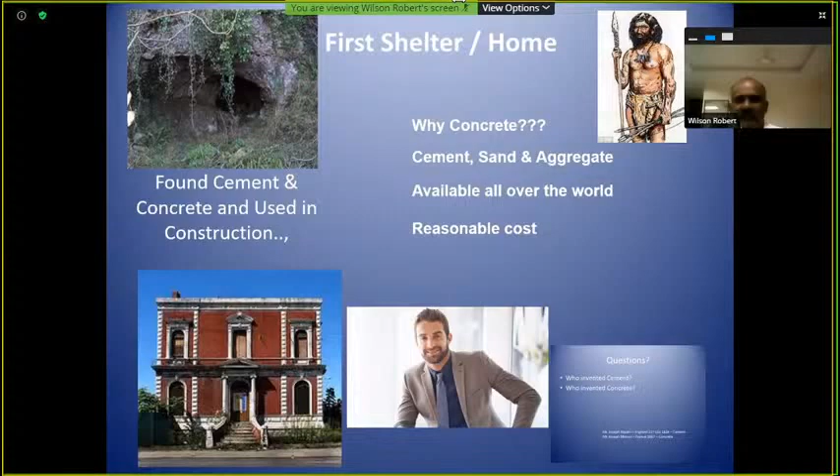So we all started from scratch, like Stone Age. That is the first house, first shelter. From there we invented cement, mortar, steel, and right now we are struggling to manage our living space, our working space in the concrete jungle.

Slowly we are trying to occupy wherever space is available in the metro, trying to utilize the space available, and since we don't have enough space to widen horizontally, we try to go vertical, increase the vertical space.

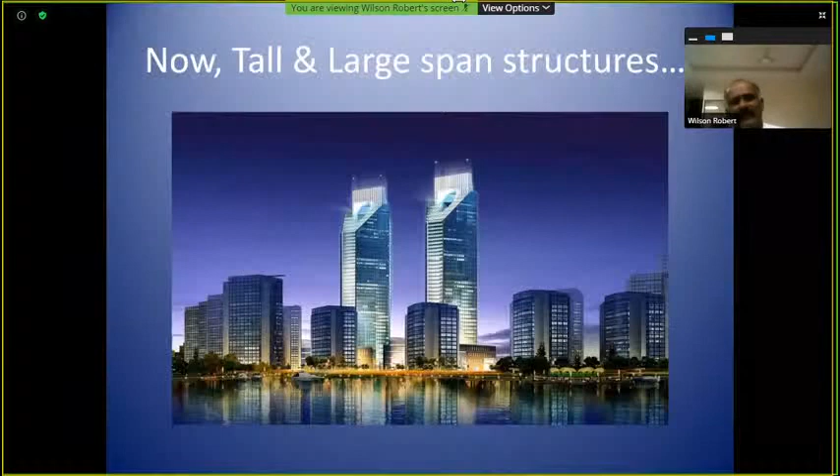You induce the stressing force into the concrete member, so that the concrete member will be ready to take care of the loads to come over that element of the structure.

So in the pre-stressing system, there are two application procedures. One is post-tensioning and another is pre-tensioning system. In post-tensioning also, there are two different types of materials to be used - one is bonded PT, another is unbonded post-tensioning system.

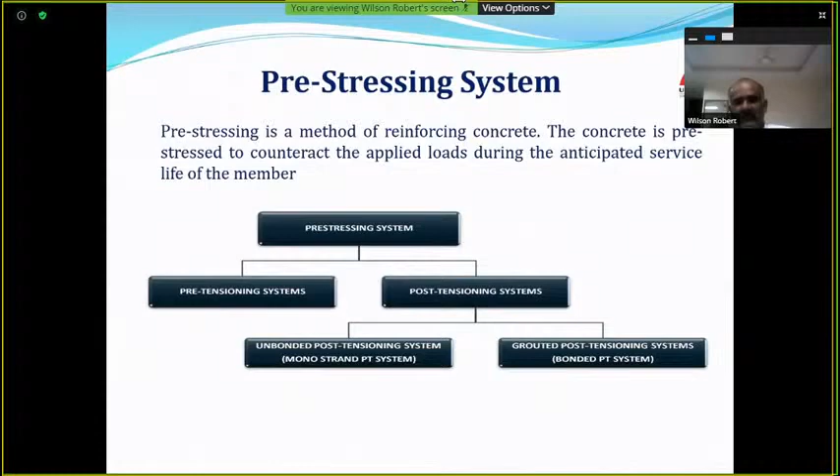So like in post-tensioning, you are inducing the stresses, you are inducing forces against the stresses resulting from external load, like live load, which will come at a later stage, but you induce the force, so when the load comes, it will take care of it.

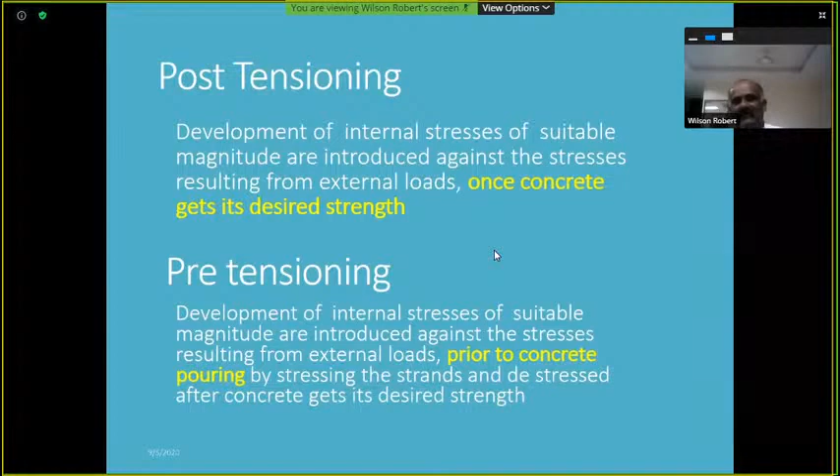Whereas in pre-tensioning, that inducing will take place prior to concreting, and once the concrete gets that 25 Newton per millimeter square, you cut the strands, and because of the bonding, the stress will pass on to the structure.

And this is a simple picture which will show how this pre-stressing system is superior to the conventional reinforced cement concrete system.

So we are replacing the reinforcement, not completely, but partially we are replacing the conventional reinforcement with this special steel. And it is an elastic material.

So now coming to this, once the load acts on any beam, there will be a deflection, and you see this deflection forms a parabolic curve. It happens because the deflection is maximum at the center span. So with ordinary conventional steel, which is a straight treatment steel, you can only have the L-bend at both ends, otherwise you have to keep it straight.

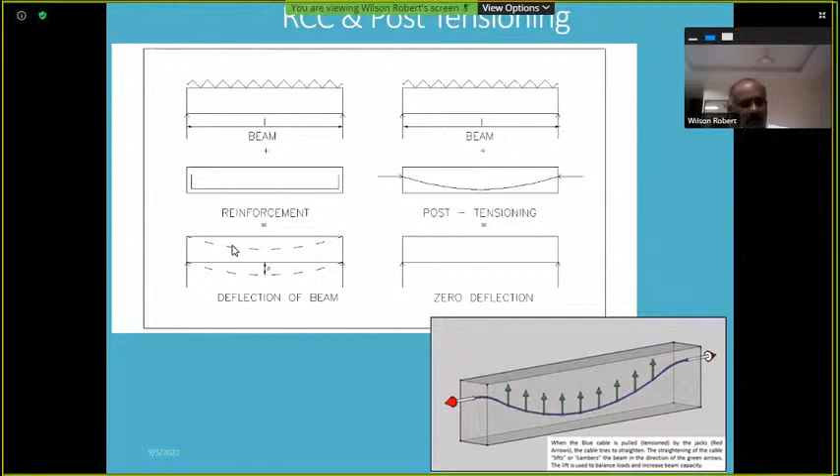On the left side, you can see there are bottom reinforcement provisions. Whereas on the right side, since it is an elastic material, you can lay it accordingly as per your bending moment requirement, and accordingly your deflection lines up.

So once that is laid inside the concrete and you stress it, you apply force to that member, there will be a hogging effect, there will be an uplift. So once the load comes into that, there will be no deflection at all, or when compared to the conventional system, there will be very minimum deflection.

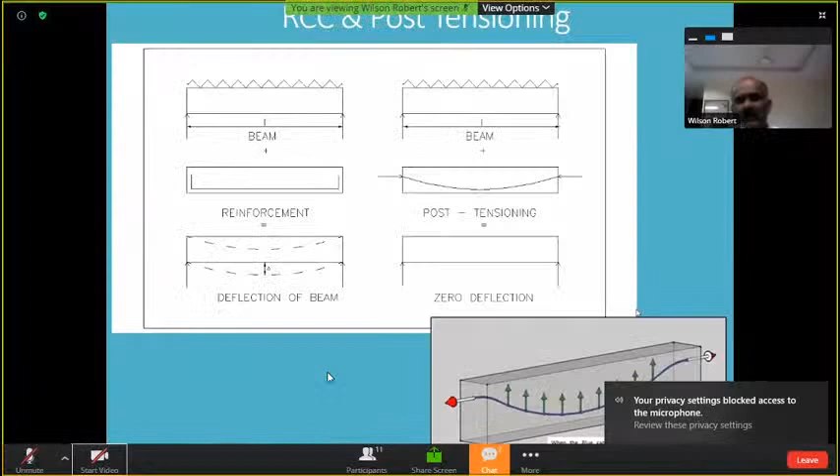Like in pre-tensioning, you tension the strands, the HT strands, and pour the concrete, maybe in the form of girders or beams. You cast it, and once the concrete achieves 25 Newton per millimeter square, you cut the strands with the bonding, it will try to move inside.

There will be an uplift, a hogging happening. So with that, you can eliminate deflection. When compared to the conventional system, it will behave very well in controlling deflection.

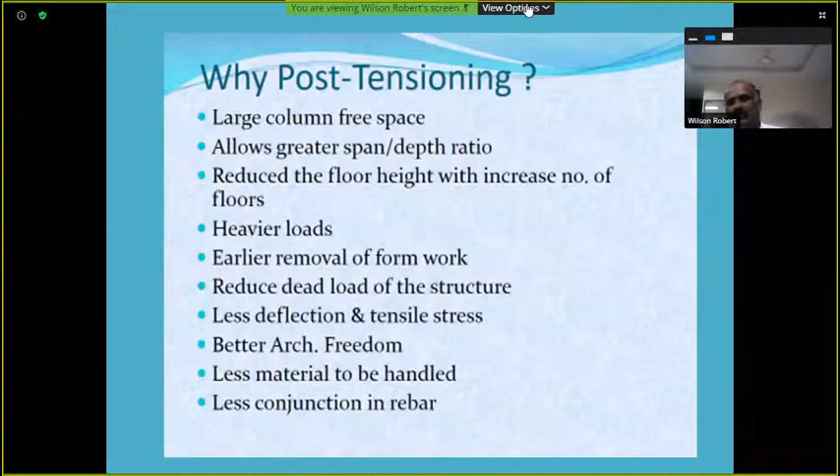You can use this post-tensioning wherever you want large column-free space, heavy and faster construction, and construction for heavy loads. You will have better architectural freedom in this, because you will have almost a flat slab compared to the conventional system, allowing a much better working-friendly structure.

Some components are needed to implement this post-tensioning work. One is the strand, IS 14268 is the IS code governing this material. In India we use 2 diameters: 12.7 millimeter and 15.2 millimeter. The capacity varies - the 15.2 mm dia has a capacity of 260 kilonewton.

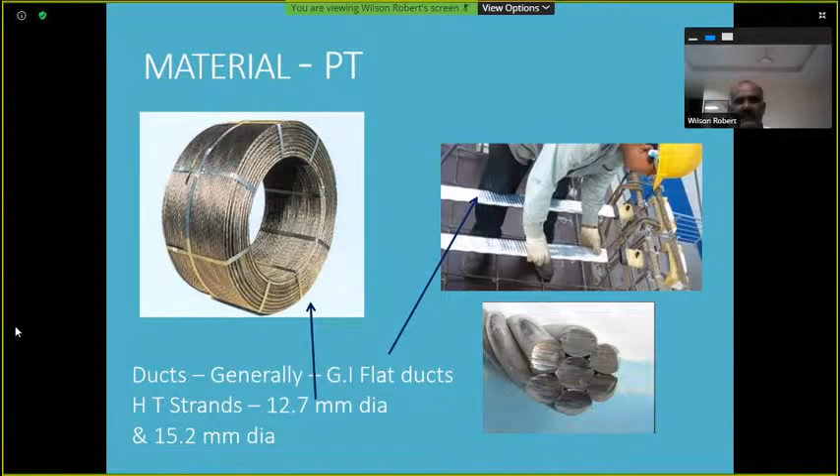So roughly 26 tons load one strand will take, and 12.7 mm is 18 ton capacity. You also need sheathing, the conduit material, generally available in galvanized iron and HDPE, mostly used in bridge projects. HDPE sheathing is very easy to lay and gives corrosion protection to some extent, helping protect the strand. These two materials are used for conduits.

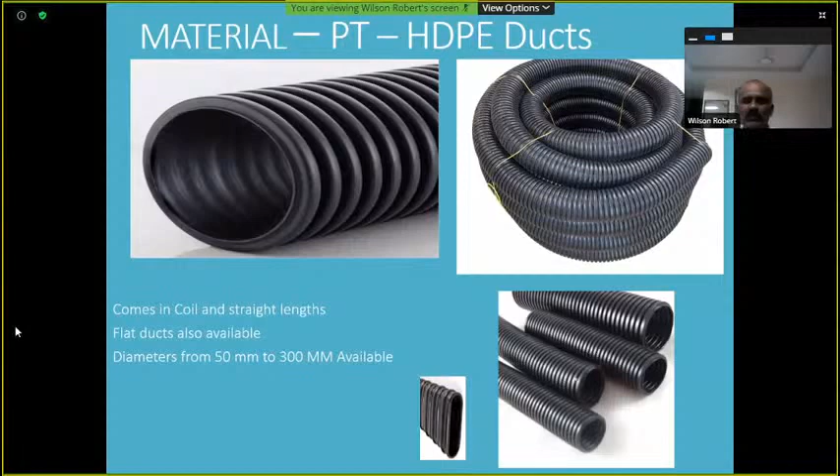This is multi-ducts laid in beams. And other components like anchorage - you can see in the picture there are guide cone, castings, and wedge plate, wedges. These are all the components you need to execute the post-tensioning works.

Generally, the major portion in bridges needs large force to be transferred to the member, so the strand unit will be huge. Whereas in buildings, since your slab element will be 180 millimeter to 300 millimeter thick, flat anchorages will be used there.

You can see the picture. This is called the flat or mono anchorage. You can have 5 strands in one conduit. Approximately 70-ton load can be transferred with one anchorage unit.

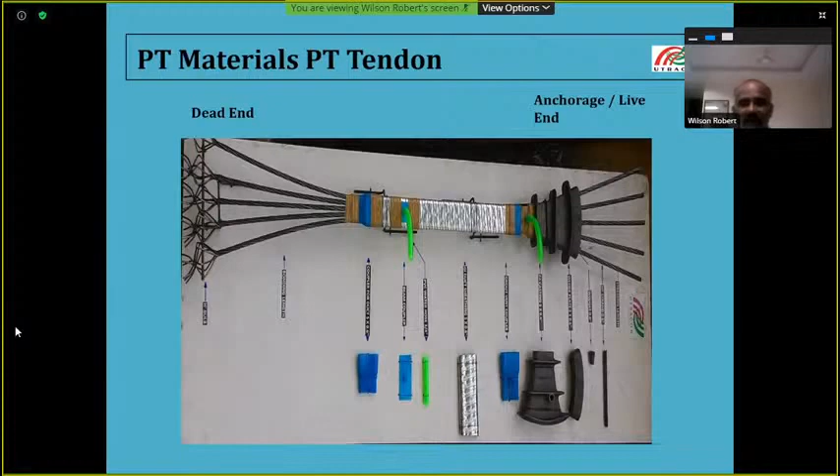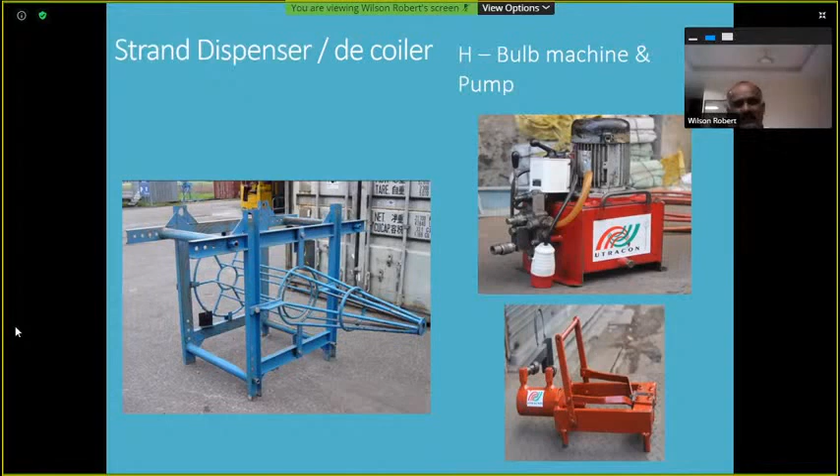Some of the equipment needed to execute this technology are dispensers and bulb machines, and hydraulic equipment - hydraulic stressing jacks - to transfer the force to the member, because you have to pull and stress the strands. Only then does the load transfer to the concrete element.

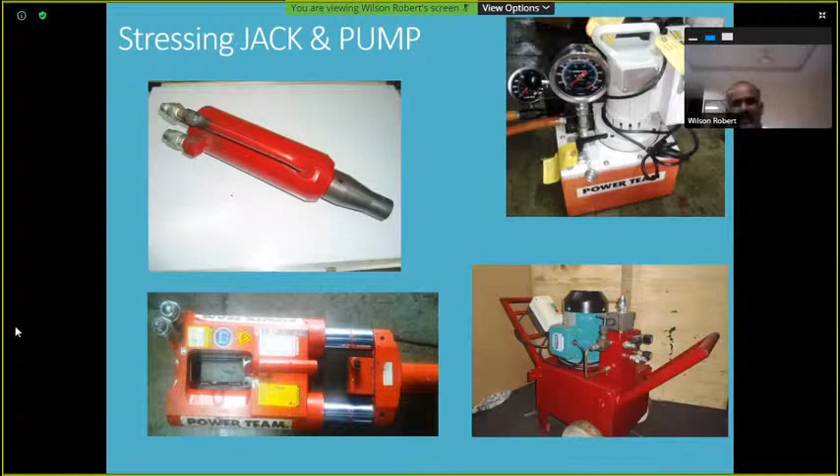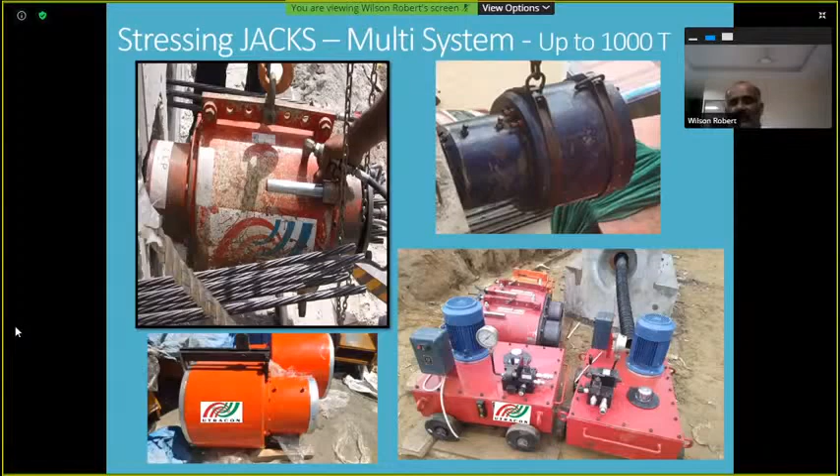So you need special equipment like jacks and pumps, and you can have tendon units from 5 numbers to 56 numbers. 56 numbers means there is a huge force - spans about 60 to 70 meters in bridges need those heavy capacity anchorage units.

You also need grout pumps, because after applying the force, after the stressing operation, you have to protect those strands for their lifetime. Cement is the best corrosion protection material available worldwide, so you use cement to grout those pipes, those ducts.

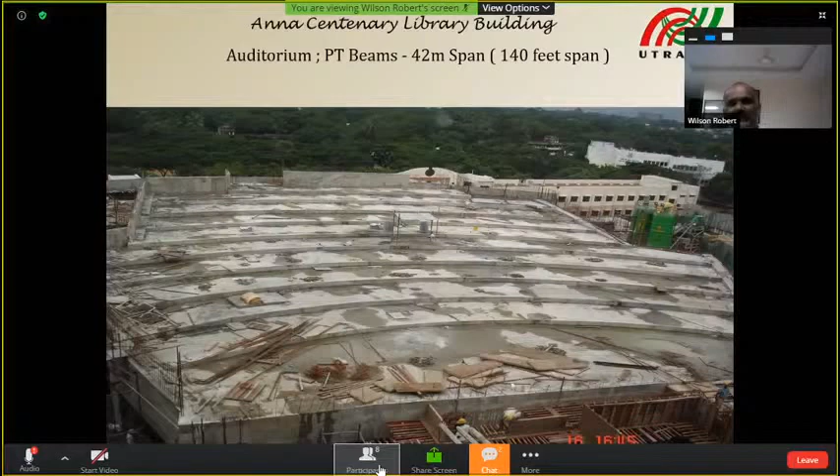This is what we did for the Chennai Anna Centenary Library - there is no support for about a 140 feet span, and it is at the top level. You can see there are elevation differences at frequent intervals - it's like an open air theater on the upper level, and the lower level is a fantastic auditorium without any support. This is possible because of PT.

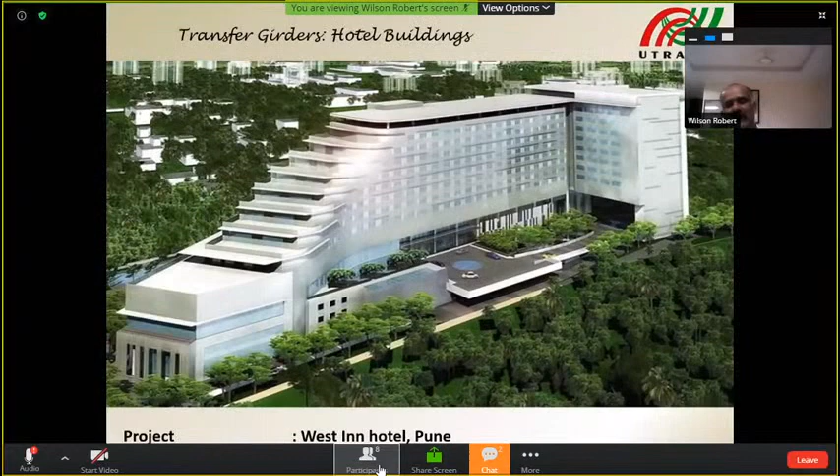Another fine example is a hotel project in Pune. You can see there are only huge columns at the lower level, and above that there are 8-9 stories. It's a hotel building, so the columns are very closely located, and this particular transfer girder is a PT, post-tensioning girder. Because of post-tensioning, the huge column loads are taken care of.

Generally, we do design and execution. As a post-tensioning company, we have a very strong design team - people from IIT Madras and IIT Mumbai work together with us, and we design all the horizontal members of the projects we're involved in.

All beams, slabs, girders - we design, and we work hand in hand with the structural consultants, because ultimately they are the responsible people for any structure. We work with the structural consultants along with the architectural requirements. So we do design and release drawings - framing, form drawings, and reinforcement design.

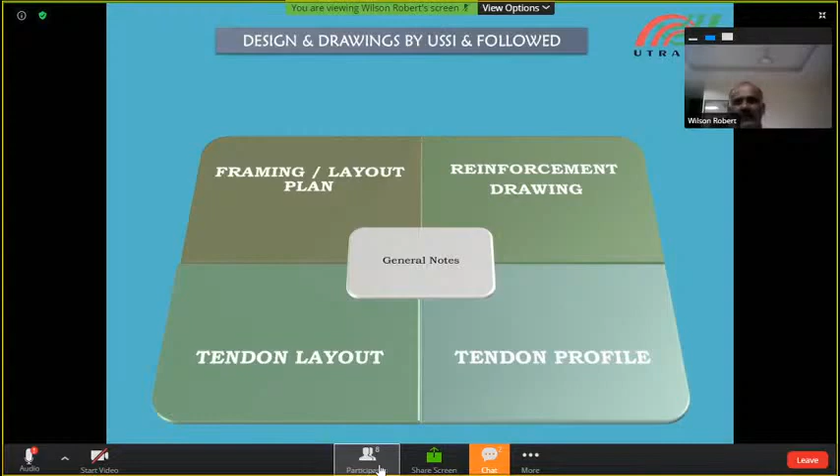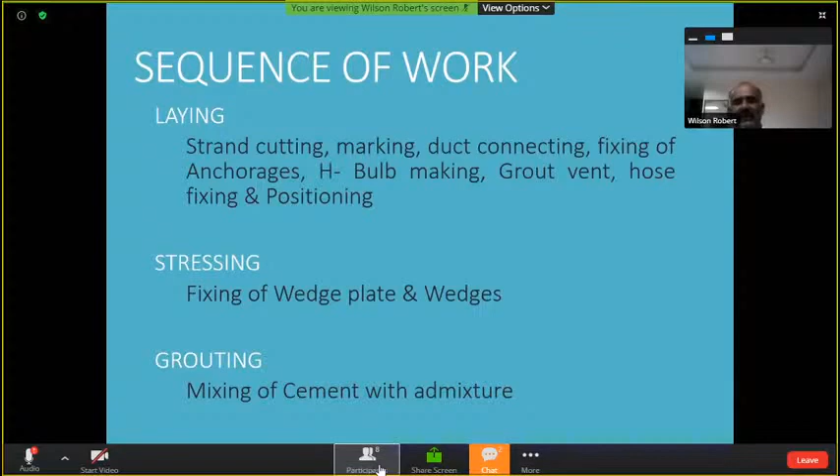We release those reinforcement drawings as well, and the post tensioning layout and tendon layout drawings. So it is our responsibility as a post tensioning vendor. We do all this, and when it comes to sequence of work, it's only laying, stressing, and grouting.

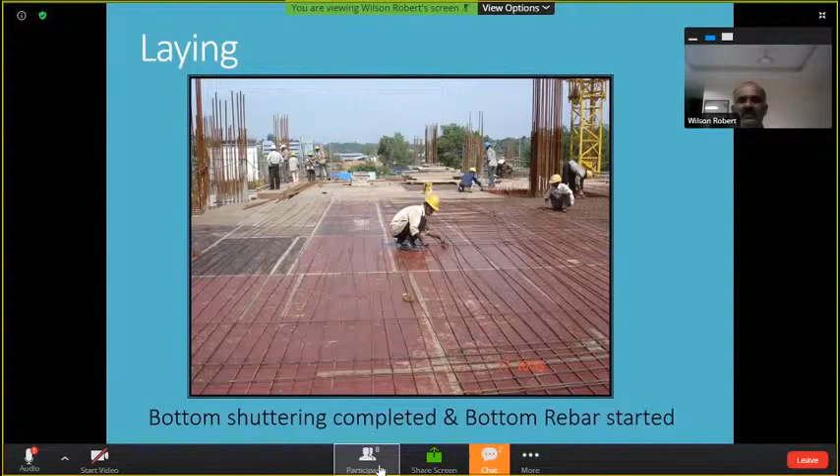It's like in this situation only that we come into the project for execution. Once you start the reinforcement work, we come, lay our ducts, cut our strand, thread into that, and we make some arrangements. There is a bulb end arrangement and anchorages, live and fixing, and it varies from building to building.

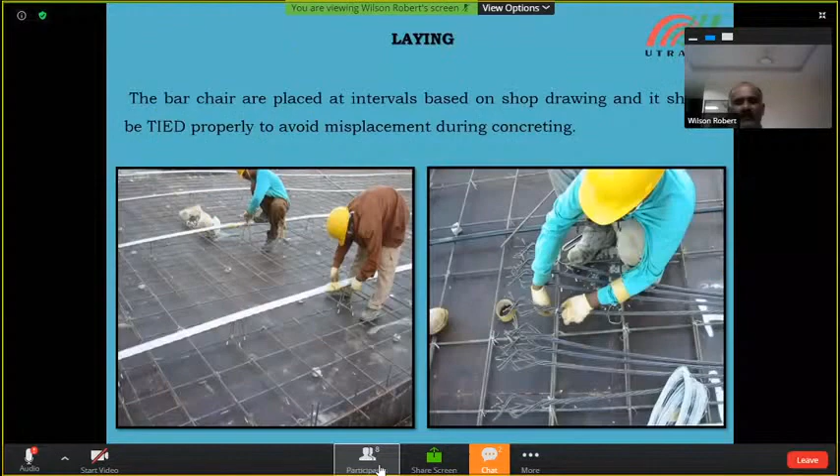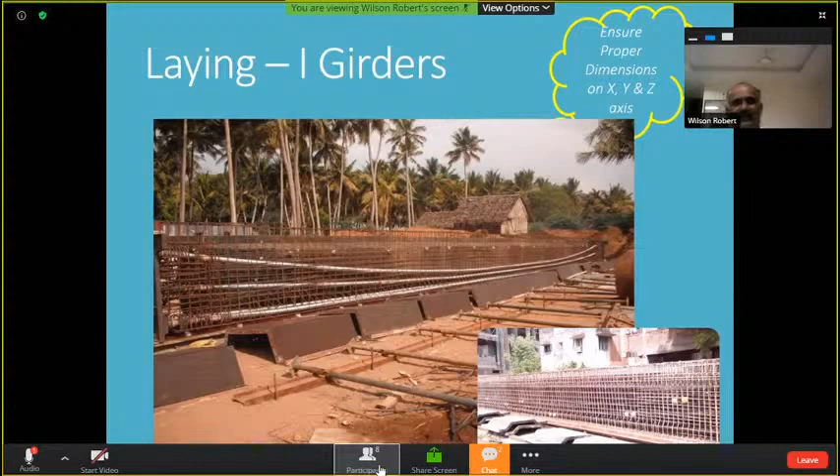It's an I girder. You can see the parabolic shape. It's low at the center of the span and high at the supports. So in girders it will be like this, and in tanks it will be like this.

In the blisters, where you stress in a very closed location, it will be like this.

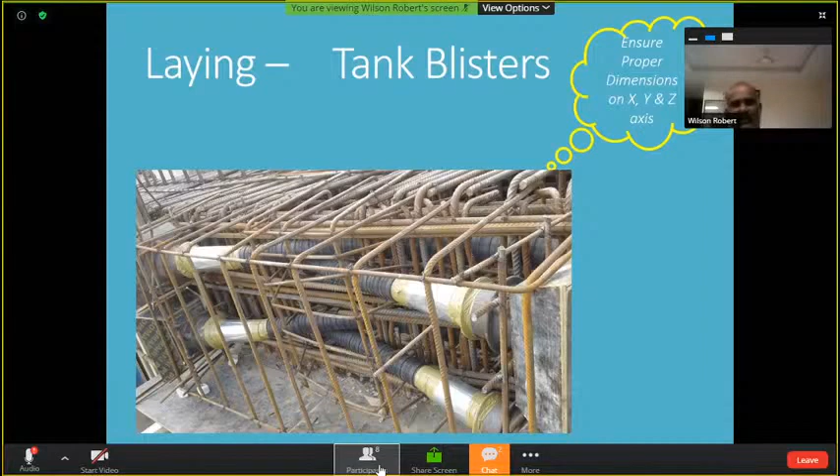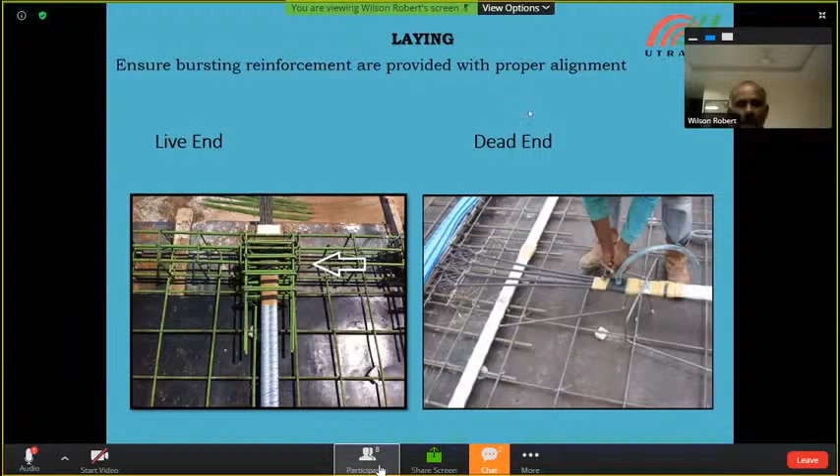Once the laying is completed, we can go ahead with the concreting, making sure everything is in place. During concreting, we have to make sure no one disturbs these tendons.

We also used to mark with paint marks, so that once you remove the formwork, you'll be able to identify your exact duct tendon location. So we used to make paint marks as well.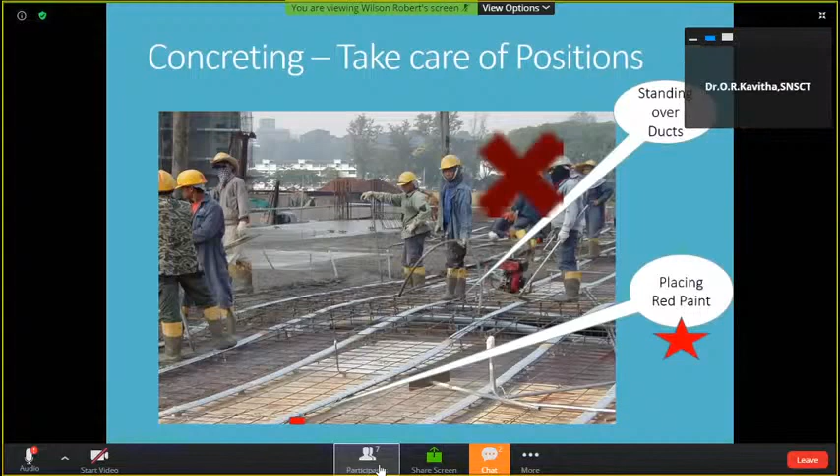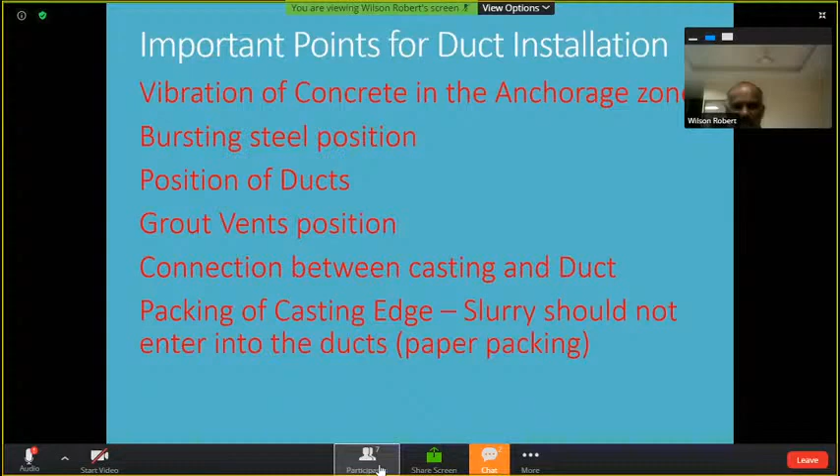So some of the points we have to take care of during concreting or any post-tensioning slabs or beams: the compaction of the concrete is very, very important. Minimum concrete grade required is M35 - 35 MPa should be your lowest concrete grade for any post-tensioning structure.

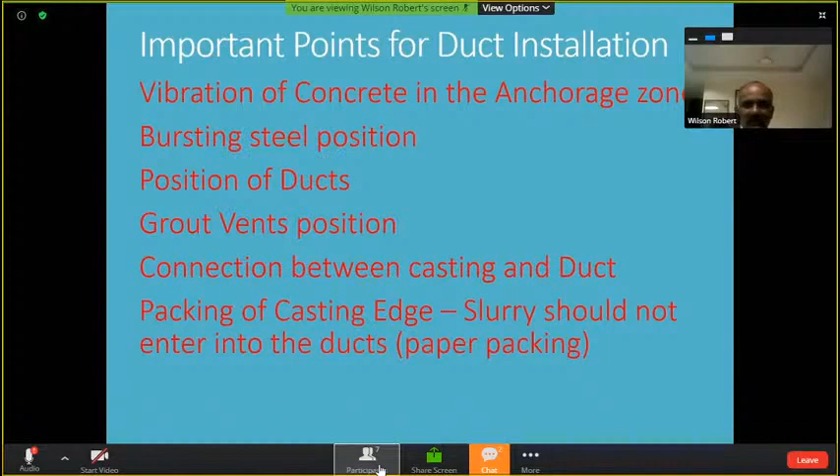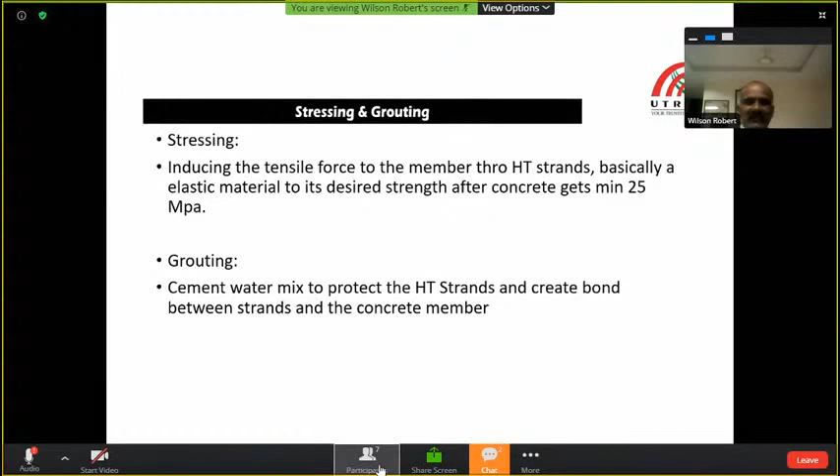And the bursting steel position test, I think we'll take care of that. Then once the concrete gets to 25 MPa, that is 25 Newton per millimeter square, we can do the stressing. Stress is nothing but load by area, and whenever you do stressing, you can measure the strain.

Strain is change in length by original length. Once it is an elastic material, the modulus of elasticity is stress by strain. So once you are applying stress, you can always measure the strain as well. Each and every strand has to be measured for its elongation, for its strain. That will make sure that your stressing operation is correct or wrong.

Because there are many codal provisions. Indian codes allow for plus or minus 5% deviation, whereas international codes allow up to plus or minus 8%, because this is very important. In any post-tensioning structure, strand is the active steel, while conventional rebar is passive steel. So all the force transfer will be taken care of by only the strand.

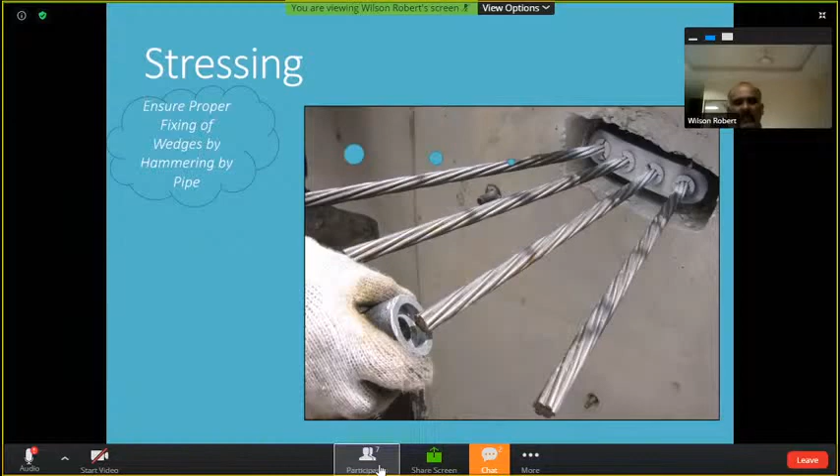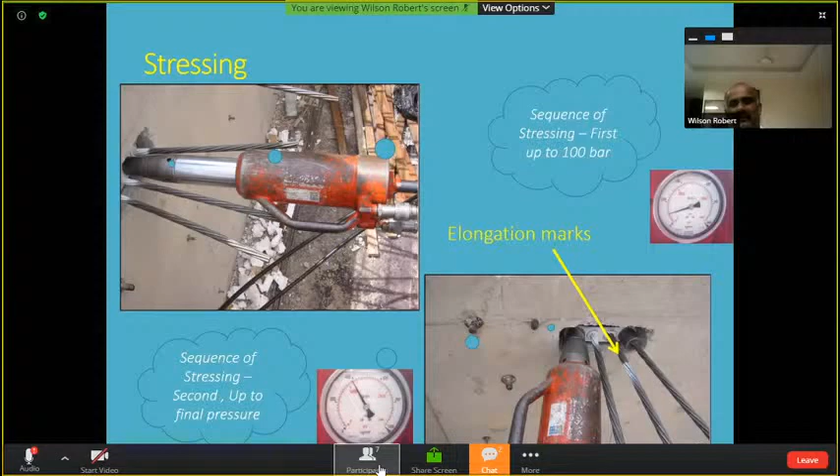So the stressing activity is very, very important. You can measure the elongation strain in each and every strand, so that we make sure that the designed force has been successfully transferred to the member. So you need some exposure and experience to know this, to adopt and execute this technology.

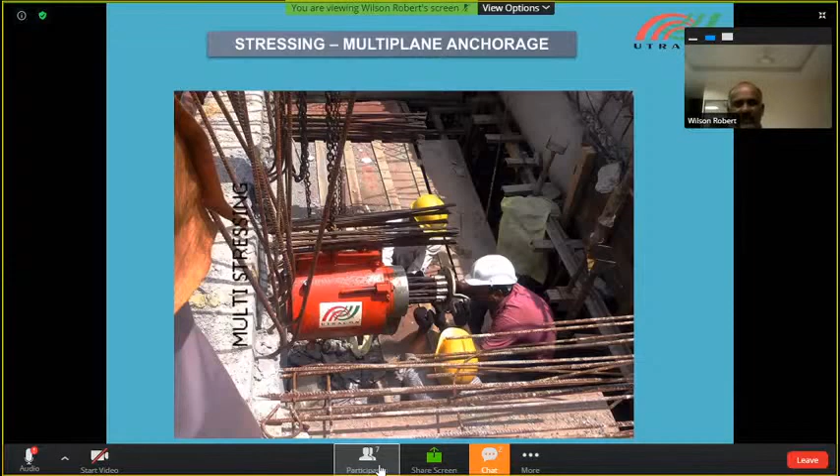As I said, it starts from 5 strands to end up with 56 strands. So there are huge jacks available for multi-strand work, and this is a picture taken in special projects where at the moment we are using up to 27 strands. That means roughly about a 600-ton load applying in each and every tendon.

So it is huge, but for special projects, for vehicular dynamic load, we need these kinds of anchorages and stressing. Once the stressing is over, wait 24 hours for anything - for any slippage or any concrete bursting. I am spelling out concrete bursting because if your concrete doesn't have the capacity to take this stress, to take this impact, it will give away - it will burst.

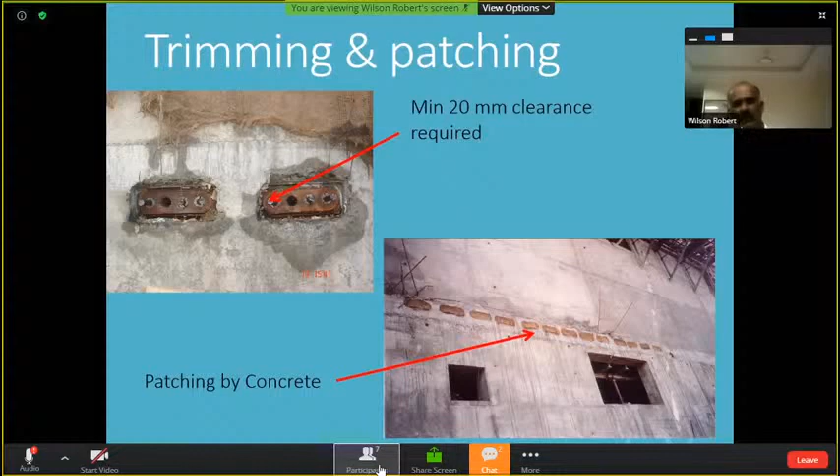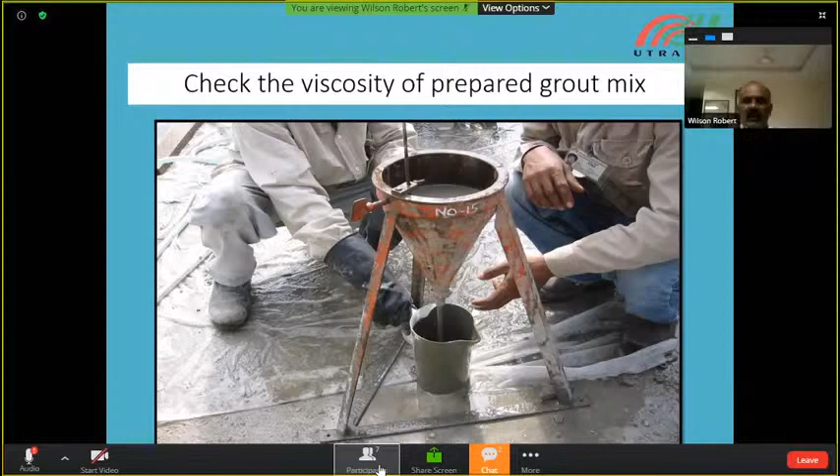So grouting is very important for post-tensioning. Once the provisions are in place, you have to check the flow time - this will determine the flowability of the grout material, and like how we do compressive strength tests, you have to make cubes as well.

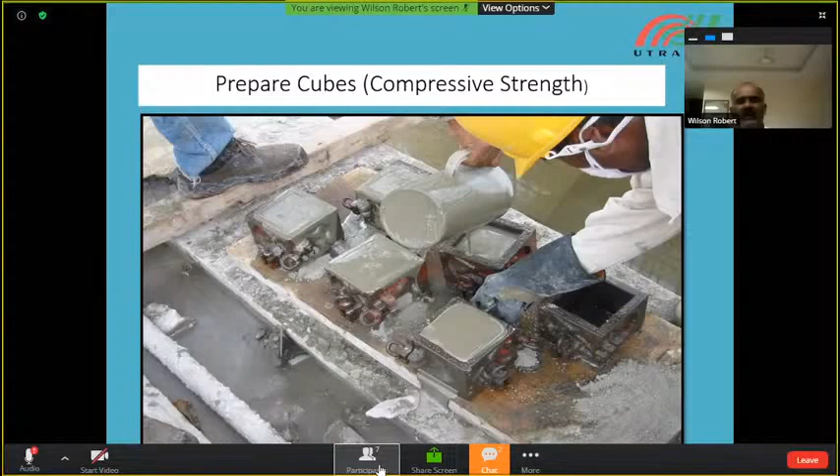Instead of 150 millimeter square, here you have to use 100 millimeter square cubes. So once the thick grout fills the entire conduits, then the job is taken as completed.

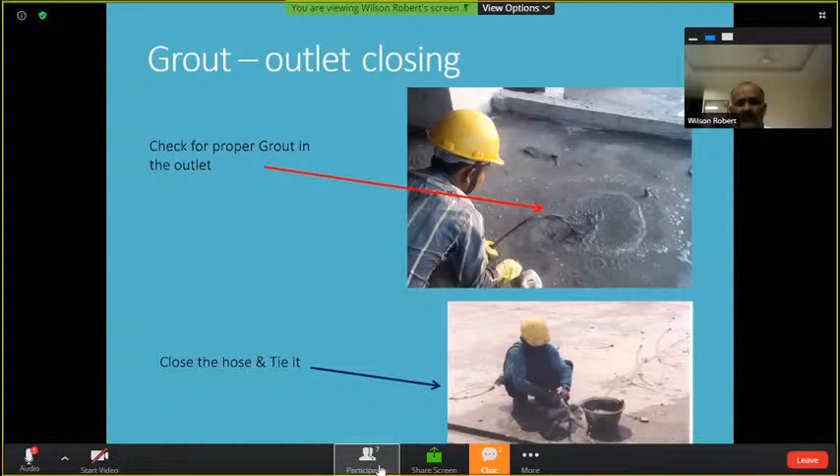So as I said, grouting needs to be very properly done, and stressing is also a very important activity which transfers the pre-stressing force to the concrete. So it is very important. At the same time, it can lead to accidents if it is not properly handled, so it is dangerous as well.

So stressing needs to be done only through trained, skilled personnel. Not anyone can do it. So probable lapses, if the concrete is not of adequate strength, it may give up. It may happen because of voids or because of honeycombing.

And in post tensioning, if the conduit laying is not proper, then the cement slurry from concrete can go in. That can disturb the stressing, and that can even lead to snapping.

The strand can snap. And only after stressing are you allowed to do the de-shuttering. In post tensioning slabs, you will not be able to do the de-shuttering simply after concreting.

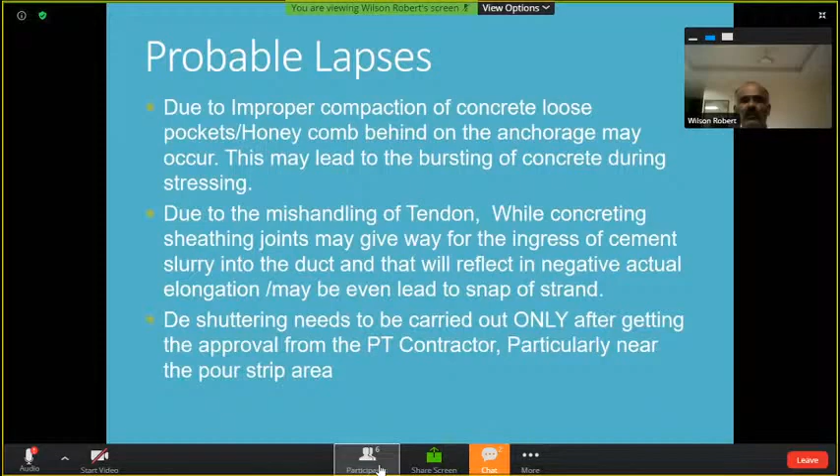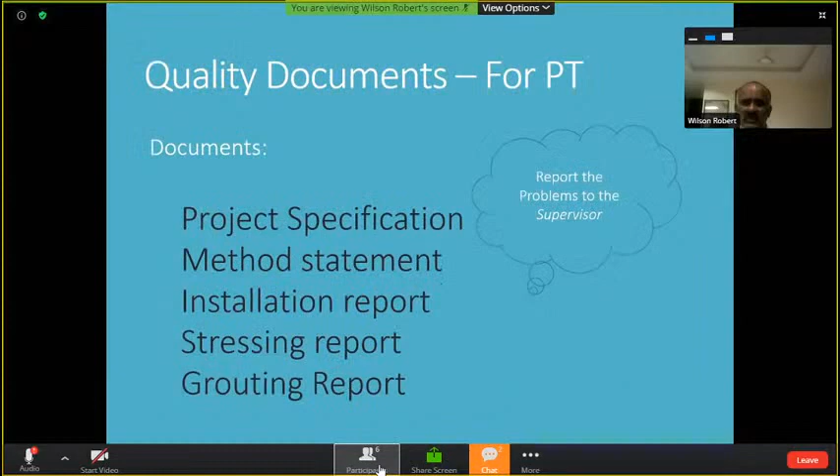So that I'll explain. For this, we submit the methodology for how to execute post tensioning, and there are some quality checking checklists that we have to do as well.

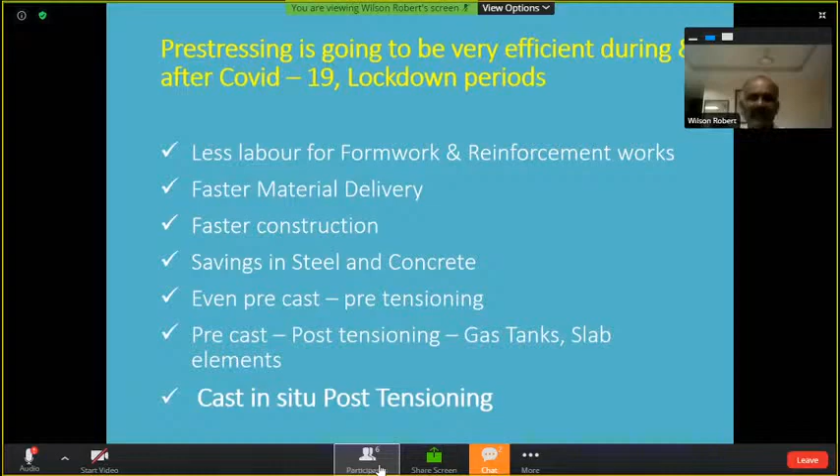And in comparison, how efficient this is - very less steel, very less congestion, and the formwork will be very fast - many things are possible.

One fine example is this building in Bandra Kurla Complex, which we constructed about 4 years back in Mumbai. In 1 month we could do 10,000 cubic meters per month, at the level of about 5th to 7th floor. We could pour 10,000 cubic meters in a month.

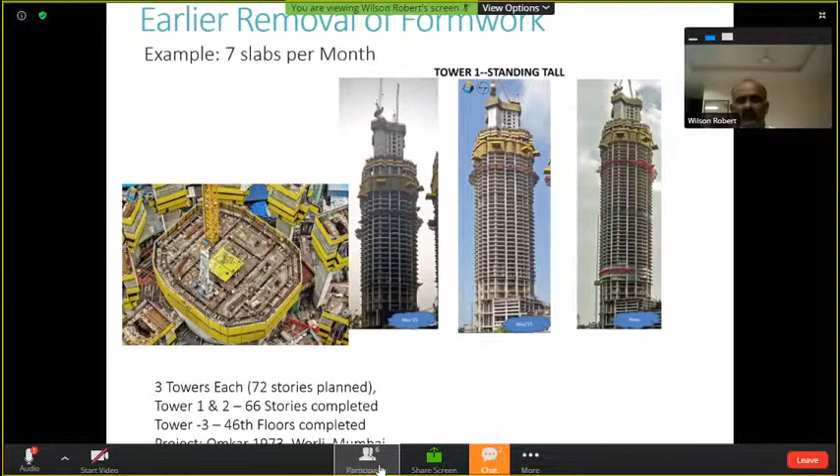Another example is Omkar Worli Tower in Worli, Mumbai. We could cast 7 slabs - you are seeing all the residential flats. So we could do 7 floor slabs in 1 month. It was very fast, only possible because of post tensioning. Every 3rd or 4th day we used to stress and take the formwork up to the next level, and we could achieve this.

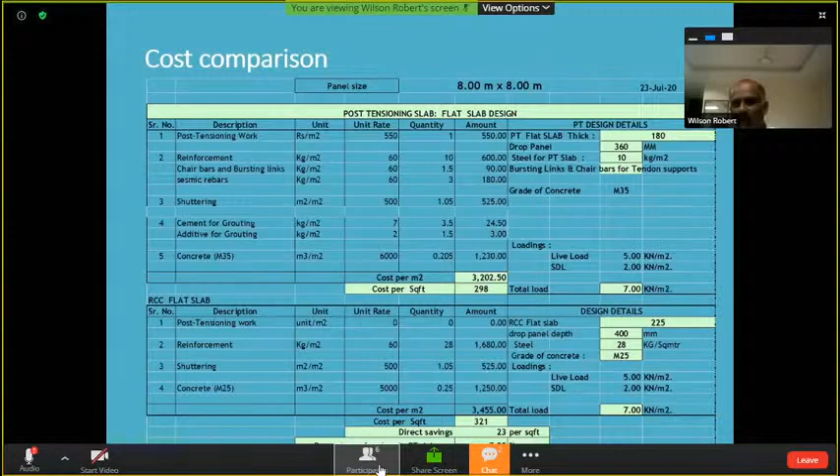When you compare the cost, if the panel size is 8 meters by 8 meters, you will save roughly about 8%. And if the panel size is 11 meters, minimum savings go up to 17%, cost only. Apart from that, there are many advantages like early formwork removal, better architectural freedom, and many other things.

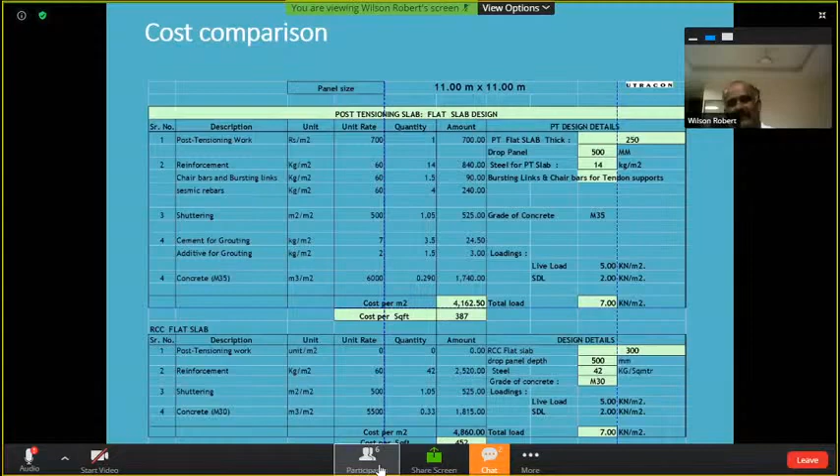Some special projects I want to mention - here, Bengaluru Metro is a post-tensioned structure, the first time, I think, in South India. At the top, the metro rail will be passing, and at the lower level, they are open for ground traffic. So here, the segmental construction and even the overall construction was possible because of post tensioning.

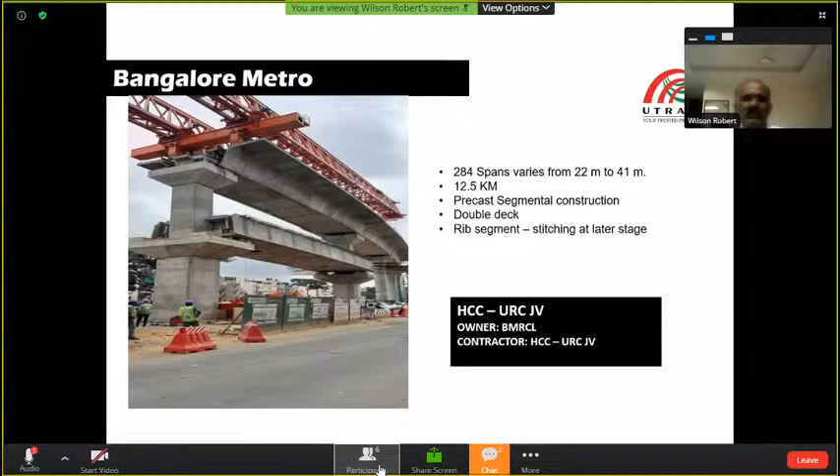And even in Chennai airport, which many of us will be visiting very often, you could see all the precast elements cast in a different location, put into erection and stressed together. So the deck is ready for traffic. Many things are possible in post tensioning, and it's fast.

You don't need to keep your formwork in place. You can precast post tensioning, and once the member is ready, shift it to a truck. Even during night time, with less traffic, erect it in that location and stress it. That's it - very simple and very fast. You don't need to disturb the traffic in the daytime.

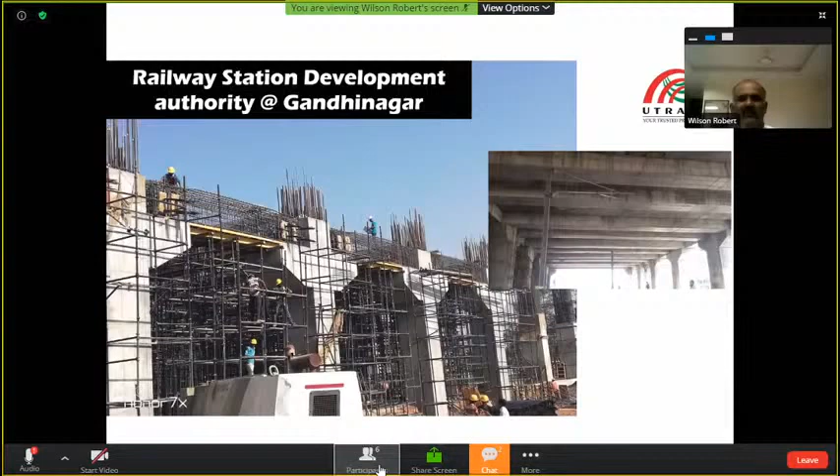One fine example we did for Indian Railways in Gandhinagar - it's a pet project of our Prime Minister. It's a very small area, a small town, Gandhinagar, just away from Ahmedabad, where you could see the train passing, and without disturbing the traffic, we could do this station building. And over this station building, there is a 5-star hotel constructed.

It's the early days, so these kinds of things, large span structures, can be done in post-tensioning. That is very working friendly.

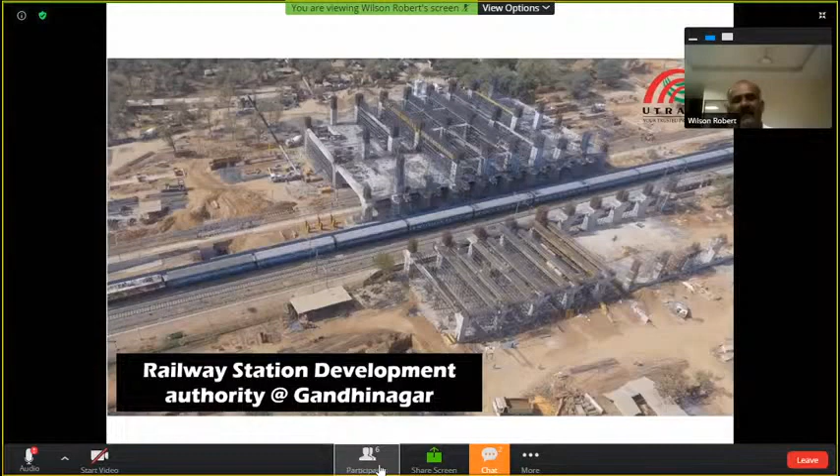And one more project I want to highlight - it's a tank, and the client's demand is that all 8 numbers of such storage tanks be completed in 4 months.

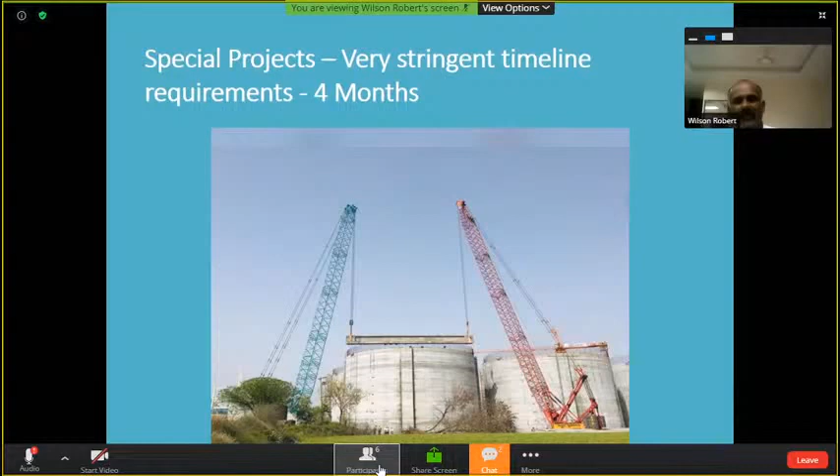Because of post-tensioning, it was possible the tank was constructed by slip-form technique. It's non-stop concreting, and it's a post-tensioned structure. Parallelly, we could cast the slab elements. The entire slab has been cut into many pieces, and it's all post-tensioned slab elements. Once the tank is ready, the slab elements are also ready.

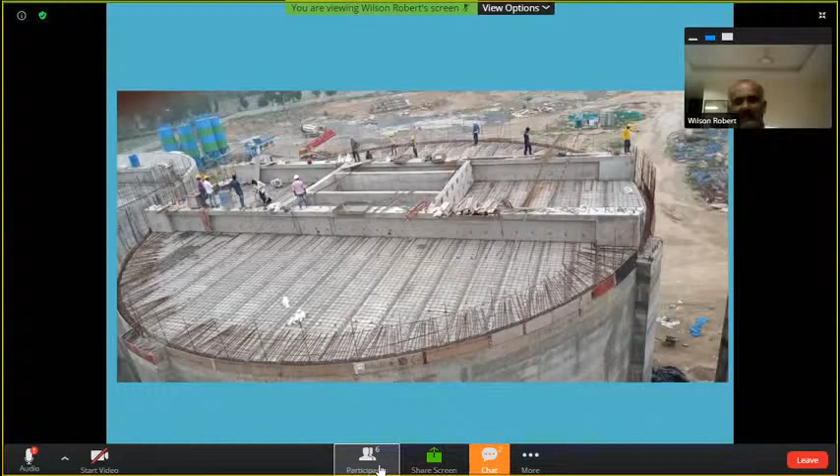So simply lift up by crane and put it in place, cover it up. The top coating, 75 mil thick, the second layer of the slab is done. Similarly, it's a pre-tensioned slab.

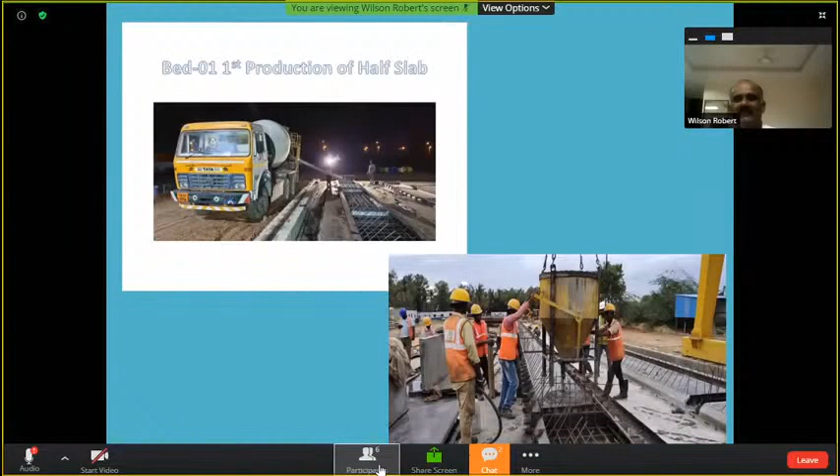You can do pre-tensioning for whatever slab you want to make, cutting it into small sizes. In a casting yard, you cast it, tension it, cut it, shift it, and keep it in position. Even for commercial buildings where you want to construct very fast and don't have enough space or time, you can adopt this.

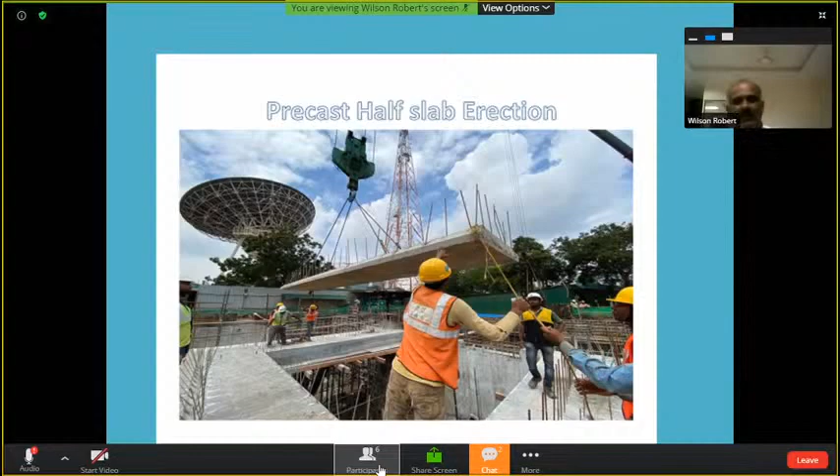Once you start the foundation, you start making slab elements parallelly. Once your columns are ready, you only need to cast the edge beams, then shift and place it. Even staircases can be precast, shifted, and put in place.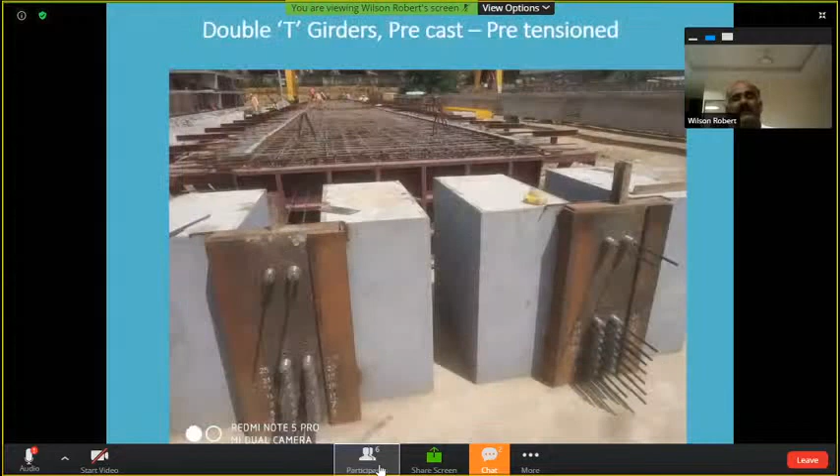Even double-T girders up to 11 meters span - nowadays all the IT parks use these double-T girders. It's factory made. You can cast it, tension it, and cut it.

Even in Bangalore metro station buildings, we are doing this, and it's very simple. You only have to shift it and put it in place. The platform is ready, the building is ready, the roof is ready. So this pre-tensioning technology is very efficient for this.

Due to COVID, we don't have enough labor. Workers are still coming from UP, Bihar, Jharkhand. So we can manage with much less workforce, giving a cost advantage in buildings.

As I've already explained, the minimum advantage you will have is 7 to 8% savings. Indirectly, you also get architectural freedom, faster cycle time, and many other benefits in the post-tensioning technique.

That's all. I think I have taken 5 to 10 minutes more, but that's all. Thanks, sir.

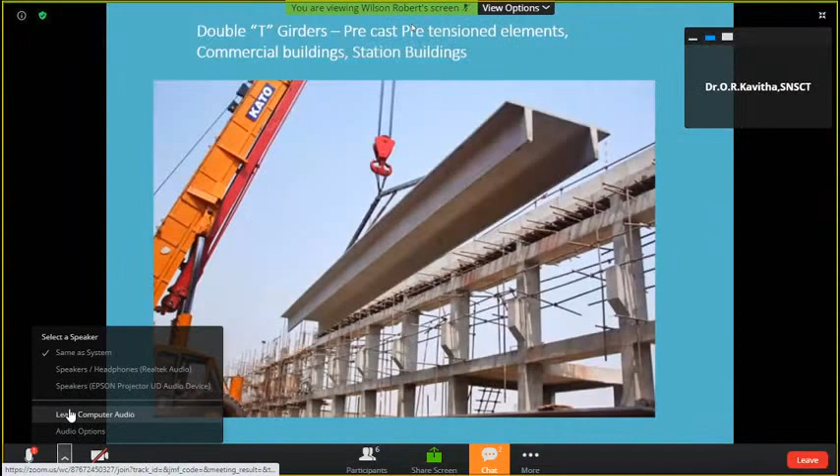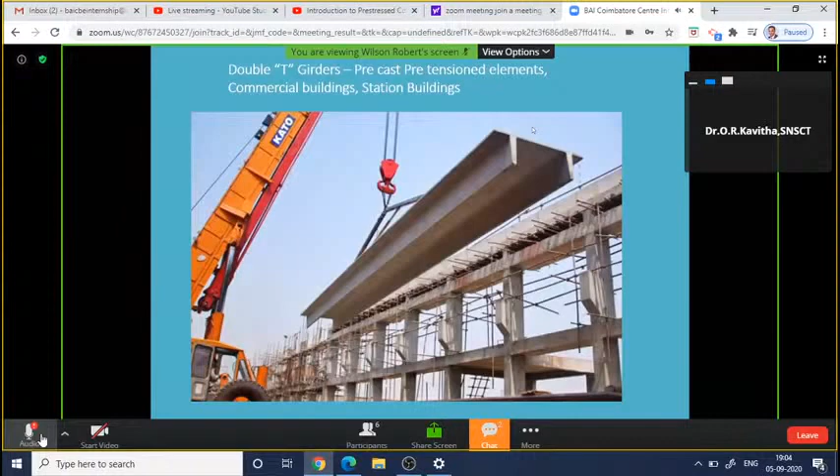Any questions you can ask? Hello, Kavitha ma'am, is there any questions, sir? Karthik sir? Hello, Karthik sir? Sir, please wait a minute. Yeah, I'm okay.